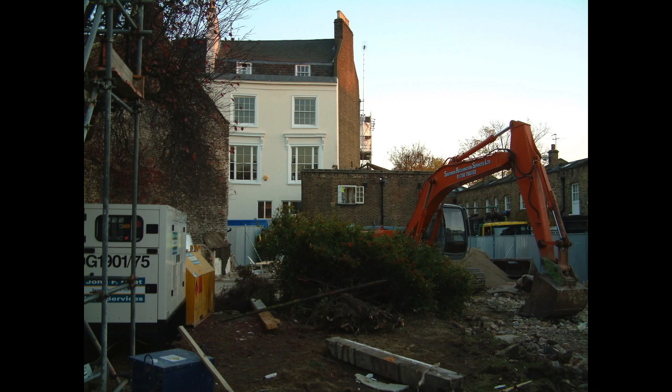The house looks like so, and I shan't talk in great detail about it. But to realise it, to create it, one day we arrived, having got our planning permissions and so on, with a digger on site and started bashing things around, digging holes. We created this great subterranean undercroft in order to insert the swimming pool, which is part of the brief, which is actually what I'll mainly talk about. And what I enjoy here is this kind of temporary steel strutting, which forces the earth apart, ready to have this concrete insert, if you like, going in to form the swimming pool. So big holes, as you can see, and then the swimming pool itself.

This is underground, and you can see that these great beams straddle the width, almost taking the place of those steel props that you saw earlier, forcing the earth apart. And having forced the earth apart, we've managed to create the opportunity for daylight to come into the space and play down across the beams, to play across the pool and produce this extraordinary ladder-like reflection. So it produces this very austere space.

But I think what I found here was the interest in the beauty of the raw material, that often it's used and regarded as a sort of cheap and nasty material, damp car parks full of stalactites. But actually, concrete, if used right, is actually very expensive to do, and it has a material quality, I think, which sets it apart from many others.

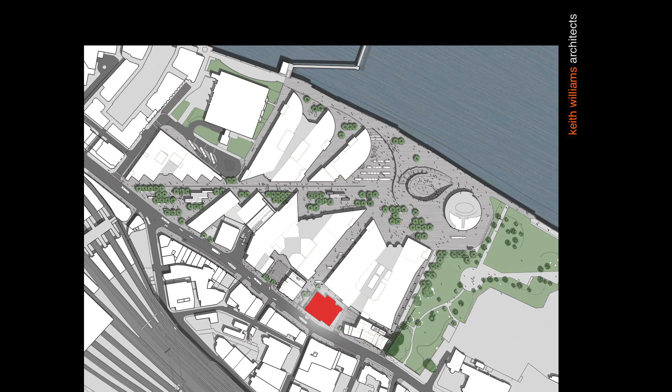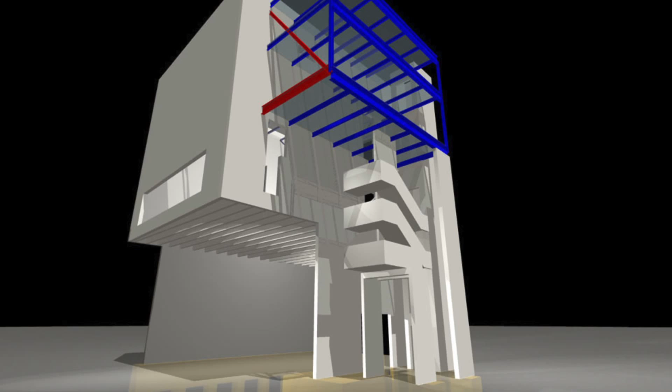At about the same time we were working on the Unicorn Theatre in Southwark, which looks like so. And what I wanted to try and achieve was a series of huge cantilevers over the foyer to dematerialize, I think, the corners of the building. So this is Arup's structural model, the grey being concrete and the blue and the red being pieces of steel clipped and bolted onto the concrete.

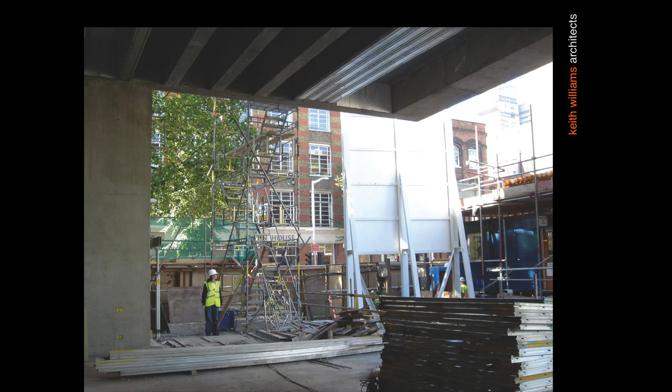You can see there's this enormous cantilever, and the cantilever actually supports the main theatre, which is in the sky, 7 meters above the pavement. And then the cascade of the staircase, which is part of the procession from the street to the seat. So during construction, you can see this huge cantilever, again with trabeated beams manifesting itself.

Concrete is incredibly heavy. It weighs about 2.4 tons per cubic meter, which is quite a lot. So that staircase will weigh a number of tons. And I think what I enjoyed with this project in particular was the perversity of making something very heavy appear to be very light. Concrete allows you to do that, allows you to play games with it.

And also I talked a little while back of the sort of richness, the luxury of the concrete. And here I think it sitting alongside pre-patinated copper and black American walnut, it sits very comfortably with these sort of slightly luxurious materials.

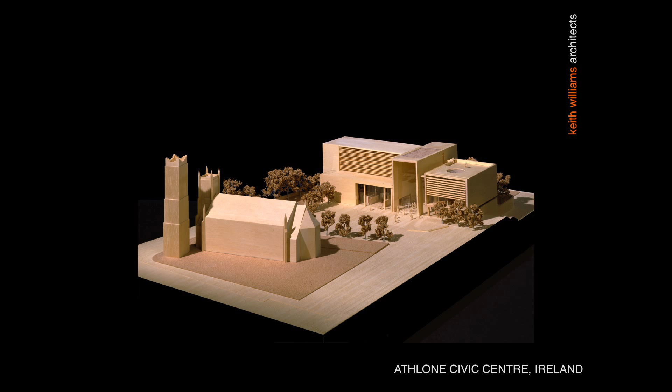In 2001, going back a while now, we won the competition to design the new civic centre in Athlone, which is in the middle of Ireland, on this former brownfield site with a church immediately opposite. Here the study model of the civic centre, which is the debating chamber, the secretariat, and the library.

We decided very early in the piece to make a largely concrete building for sustainability reasons and also for architectural reasons, which I'll come to.

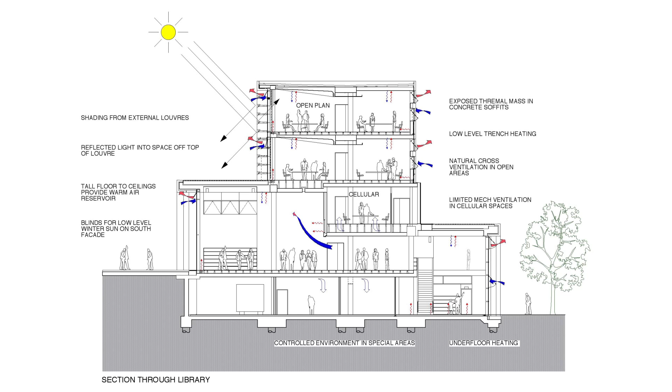This diagram, I think, is important, in particular on the left-hand side. You see the sense of brise soleil excluding the solar gain, that is the south-facing facade. And in order to prevent the building heating up in the first place, using the great volumes of the entrance hall to exhaust warm air should it come to pass that the building begins to heat.

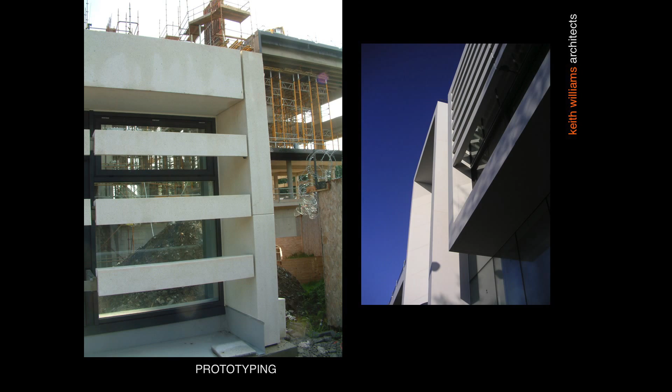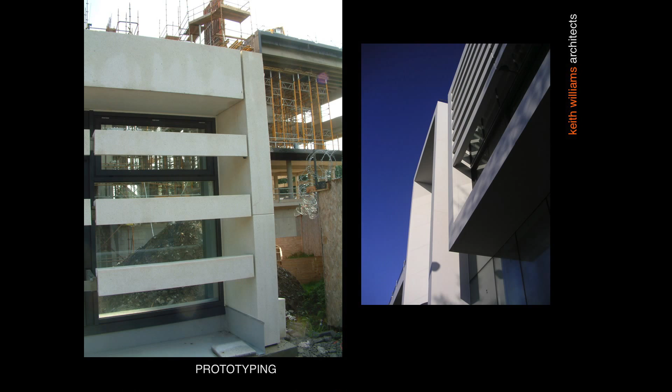Having studied that in many different options, we then created on-site a prototype of the brise soleil in concrete. It's actually, I suppose we call it cast stone because it's coloured, it's through-coloured, it has a particular aggregate colour, has a particular series of fines, that's the granular material around the aggregate, and that's cast integrally with the structural beefy stuff that does the work. That can be in many, many different colours according to aggregate and fines. Here we've chosen something almost like crushed dolomite, which gives that sort of white, pale colour.

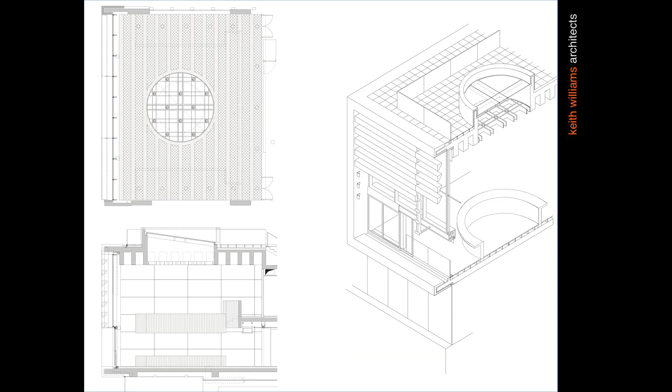And on the right, once the prototype was agreed and formed, the great precision that you see in those blades, those concretes, each one of which will weigh several hundred kilograms, which are bracketed off the glazing from the exterior. So here the detailed drawing, here the detailed shot showing how precisely the arrises can be made. And I should say these are all made in a factory, therefore there's a great deal of control over the moulds and over the fabrication and honing and polishing techniques.

And then internally, that shot you've just seen is the exterior of the space we're now looking at, which is the debating chamber, which again has this heavy in-situ trabeated roof with the oculus, the round roof light above the debating chamber where the councillors sit. And then you can just see these tiny shafts of sunlight which seep between the brise soleil, which shows that it does its job.

Above, the surfaces are clad in precast concrete on the roof terrace. So here we're looking at the exterior of the building, which is completely clad in precast stone, which is actually sourced from works in Dublin, so 80 miles away or thereabouts.

The importance of the architecture treatment and the surface materials is really that this is an important, fairly evidently important public building. All of the important public buildings in this town are actually made of stone. Not white stone, not pale stone.

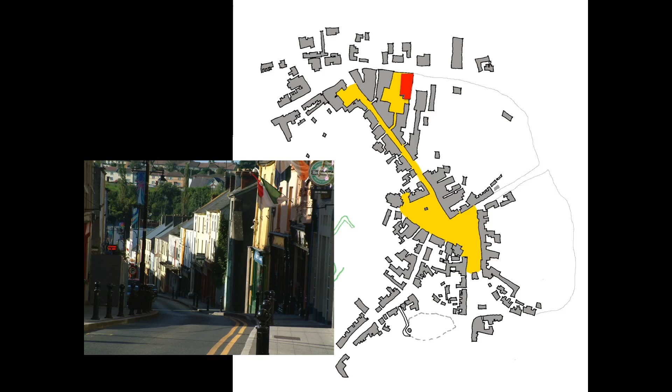So in this hill town, with its traditional winding main street, we created this library and county offices, built in a similar panel system of cast stone to Athlone that we've just been looking at. Here a smaller building, and the masses are grouped in a very powerful way to express the use. The top part is the county offices, and the bottom part is the library.

I think one of the things we enjoyed, having learnt a lot about the precision of this material, which is precast and comes in sort of 7 or 8 metre lengths, or less, is that you can do a whole storey or a double height space in one go, and you can create very precise junctions.

So if you look at the cantilever, it sits very directly upon the parapet of the panels below. There's no overlapping of form, which would be the more obvious and traditional way of detailing this. And also you can detail it so you have no apparent coping.

There's no metal copings or flashings. It's all dealt with totally in material, which allows you to produce these exceptionally sharp and clean lines. The Athlone bench creeps forward again into the second project.

And here the dynamic of the new building as it protrudes from the kind of light industrial buildings that surround it. Internally, the 7-metre high space is capped with this trabeated roof, which is punched through in enormous bays to bring light into the depth of the library.

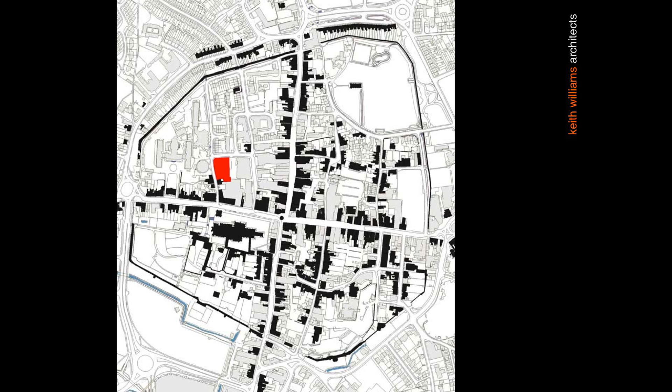The cathedral is just in the southwest quadrant near West Street, and we're in the northwest quadrant on the site marked red. I should say the listed buildings on this diagram are all marked in black. You can see the listed buildings start to run out in this quadrant because there was some substantial replanning during the 1960s and 70s, which tore down all that nasty Victorian stuff like a grammar school and a wool depot, and replaced them with a car park.

The one thing they did do, which was quite good, was to put in this interesting circular library, which is quite a distinctive building in Chichester's sort of balance of buildings.

So we won the RIBA competition to do two things: to build a new museum, but also to build a housing scheme and to try and complete an urban block which would occupy the whole of that car park site. It's surrounded by, or at least has many adjacent, quite delicate tissue of Georgian buildings.

These cottages are Georgian. But beneath the car park, at the end nearest to this viewpoint - in this bit of the car park where there aren't actually any cars, just markings - sits the extant remains of the Roman city's baths. They date from the Flavian period, which is the 1st century AD.

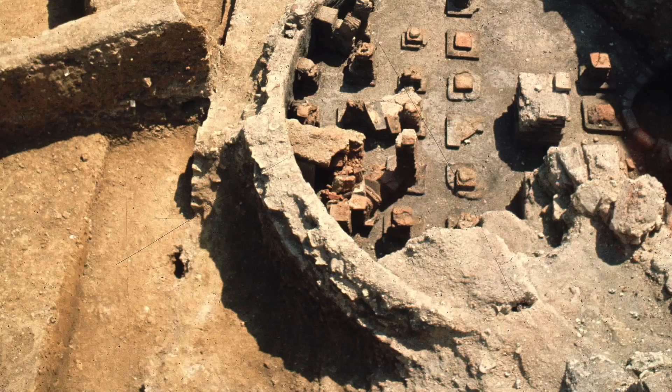So what we're looking at here is the hypocaust, about 1.5 meters below the present-day pavement at street level. And we're looking at what is certainly an apse, could have been actually a dome - there appears to be insufficient evidence to determine that. But I understand also that there are elements of Roman concrete in amongst the masonry.

So maybe we've come from Roman Rome to Roman Britain, and they brought some of their concrete with them.

To give you an idea of dimension, that semicircle is about 8 or 9 meters in diameter, so it's quite a substantial thing.

Our task, as will be evident from looking at the slides, was to rediscover that archaeology. It had been surveyed in the 1970s, covered over by backfill and car parking material, and kept encased until a future opportunity for redevelopment came along. The city determined this was such a valuable asset that it should be part of the museum, which tended to suggest that the museum would go over it.

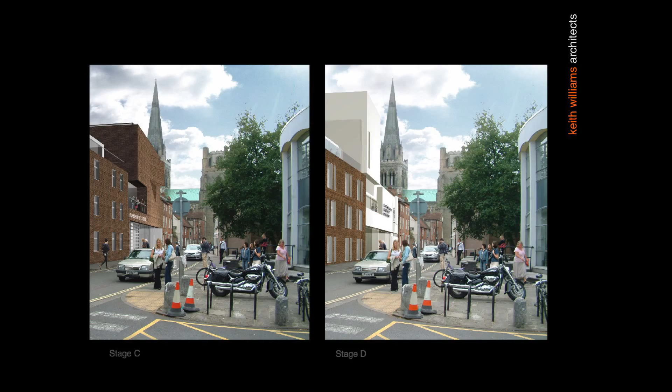We spent a long time thinking about what kind of material this museum should be. As I say, the museum is part of the site and housing would occupy the rest. Our early studies suggested brick because there's a lot of brick in Chichester, and many of the background buildings are brick. But we thought long and hard about this, and actually, even the library, the circular 1960s library, has a different materiality.

It has a kind of whiteness, a paleness to it. The cathedral, which is made in Caen stone, has a sort of yellowy whiteness when it's cleaned. So we began to think that whilst the cathedral is the biggest gig in town and will remain so, the material we chose ought to have a coloration closer to that than the brick surrounding buildings, some of which are primarily background buildings. So we decided to say, hey, we are a public building, and that gave us the opportunity to colour the building and choose a material which is a cast stone, which had something to do with that idea.

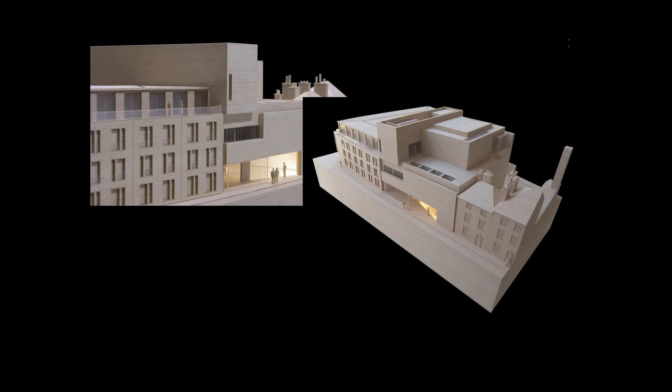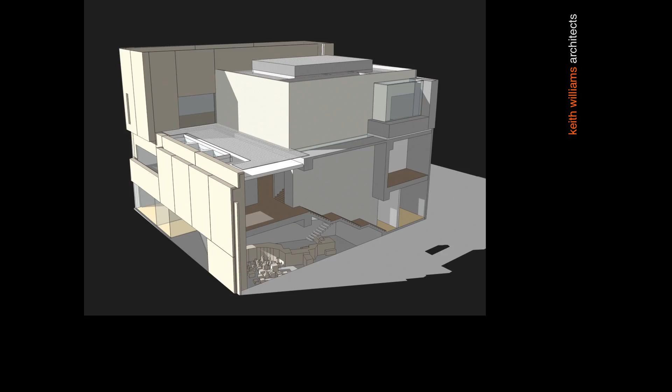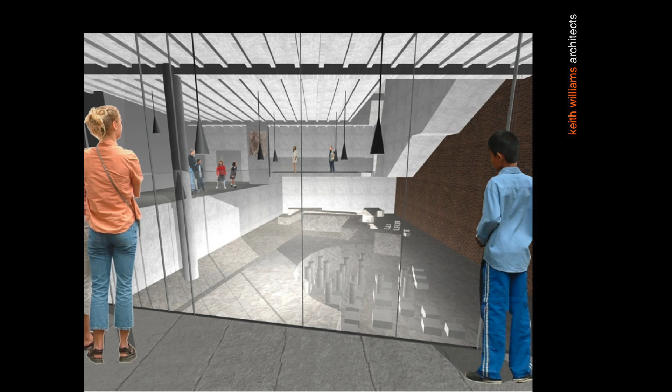So then we began to develop the form of the building in relation to the housing. We began to explore the sections, and here you can see the section through the Roman remains, some metre or metre and a half below street level, with the Roman entrance gallery and two further galleries above. So here the cutaway drawing, and early images showing the view from the street through a shop window, a vitrine if you like, which would reveal the remains to the passing public.

As it turned out, when the exhibitions were developed, there was a particular requirement to introduce projection, which meant we had to reduce the level of daylight in the public hall. So actually, in the end, part of that became screened by a film artwork, an applied film artwork. Nevertheless, the idea still works because you can still see into it.

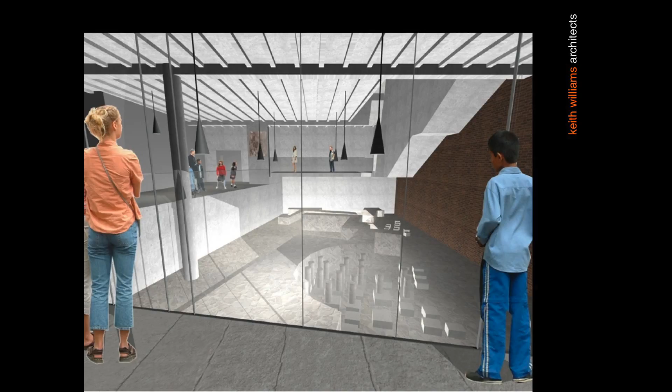Here in this early study, there's a lot of concrete, as you can see in the grey, but intriguingly, that right-hand wall, as we look at the screen, was done - we were proposing brickwork at that time. It was only later that I decided we should have a total approach to concrete, so as to make a distinction between Roman archaeology, which is primarily masonry, and our new 21st century stuff.

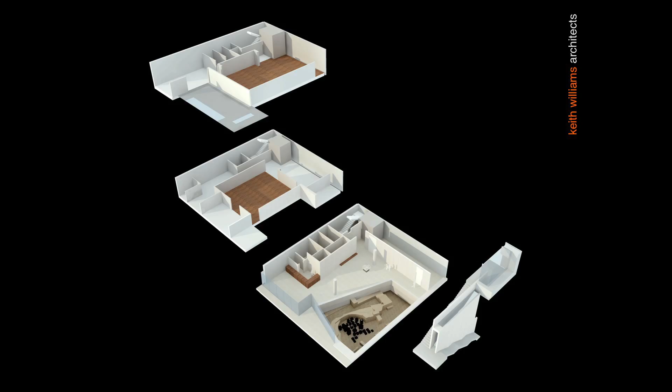So here the cutaway of the various galleries with their wooden floors, and the archaeology all linked together by this staircase in the exploded drawing, which takes you wandering up through the building of this long processional stair to the cathedral window at the top, of which more later.

We came under - I can't tell you how difficult it can be to build contemporary buildings in historic cities - there is this key date, which some say is 1820 and some say is 1830, which is the end of the Georgian period. And if you propose buildings that look like they were designed after one of those two dates, then at least a section of the community will look at you with deep suspicion, as though you're committing some appalling kind of sin by introducing contemporary thinking and contemporary design into a historic city.

But I think our clients here at Chichester, and also in Canterbury for the Marlowe Theatre, recognised very clearly that whilst these cities have an incredibly important past, fantastic historic buildings which are their main draw, they must have a future. And I think our buildings in both cases try to celebrate and embrace that idea of a continuum, introducing important new buildings into the historic cityscape.

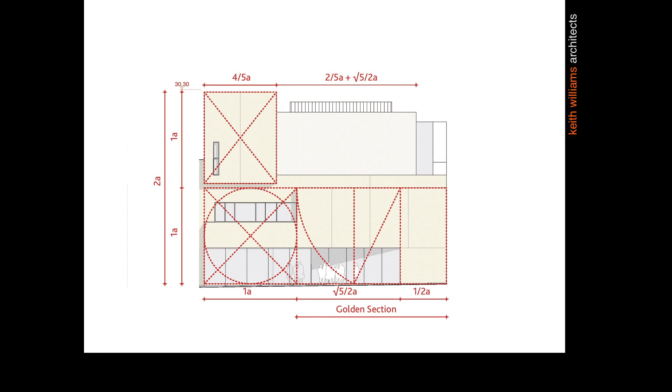In order to actually get that to work, all I had to do was tweak the height of the turret by about 100 millimetres down, and everything else just dropped into place. Which sort of told me that after you've been doing this a few years, when something looks about right, it probably is about right. This is a way of testing it, which seemed to work quite neatly and nicely.

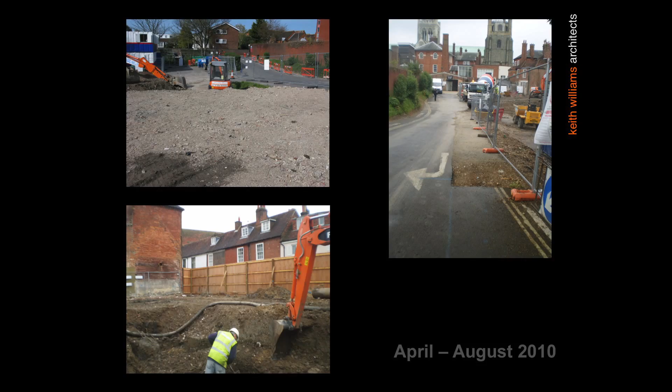Which then produced the final elevations, the final form. So we began to build the ordinary aspects of the project: the retaining walls, the lift shafts, the piling. We did a lot of work on the coloration of the concrete and its finish, which I'll come to, and we also did a lot of work with the engineers on that and on the piling.

The engineers, Techniker with Matthew Wells and his team, helped us find a way of sitting the building very lightly on its site. We needed to be very careful about the archaeology and find ways to impact it the least. The piling system that eventually came through only sits on 6% of the footprint of the site, so it has a very light touch and leaves the archaeology intact. Our building bridges over the archaeology, over the Roman baths in that sense. The piling is limited primarily, although not exclusively, to the edges of the site, but it always dances around the archaeology itself.

So in goes the piling, the secant walls, and so on. My end vision was to create a sort of lustrous concrete of an even higher order than the in-situ concrete we'd worked with previously. We had many samples created.

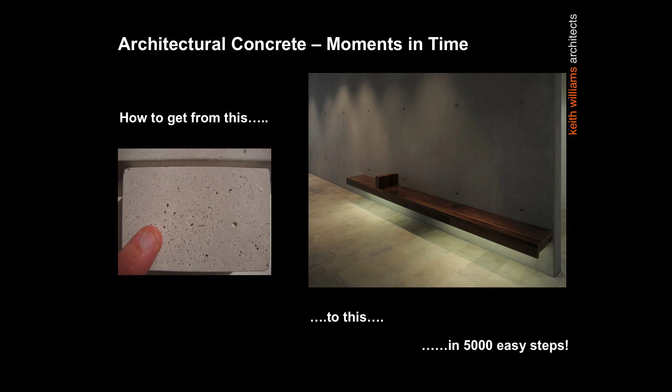What you see here is our sample in the office, which was put together in a laboratory by a concrete supplier, and actually the finished thing. I'm going to share with you the warts-and-all process of getting from something knocked up in a lab by scientists in white coats to the reality of a building site. There are few seamless routes between one and the other.

The first part was really about the performance specification, and again Techniker and Matthew Wells' team helped us draw up the specification. I wanted to move from standard grey cast concrete into something which had a surface texture, and also had a sort of lustre, some sparkly bits in it, because I wanted to see if we could make a kind of lustrous concrete that added a subtle sheen and dimension to this, to me, wonderful material.

And this is not easy. We're dealing with very heavy materials that get put together on site in often pretty awful conditions. Somehow it always seems to be that they're pouring concrete in January and it rains and it's awful and so on. So it's very difficult.

We introduced a series of silver granite aggregate elements and fines into the concrete, and then surface brushed it to achieve the finish where, on the right hand side, the finger is pointing - not my finger, I should say, my project architect's.

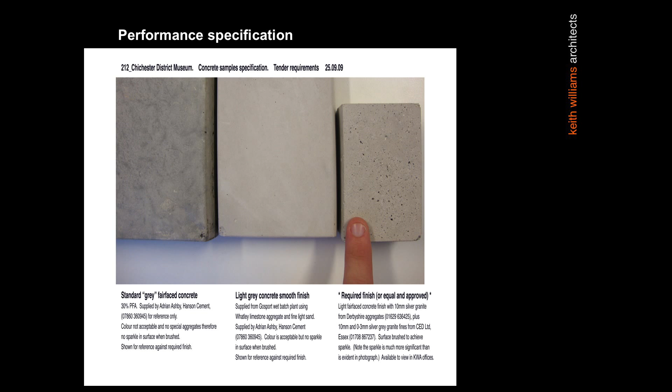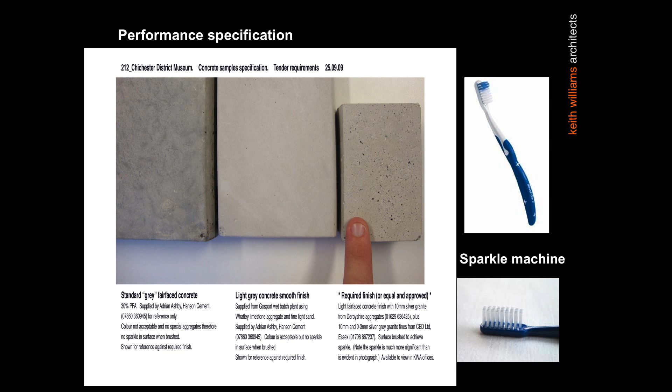There was some concern about how we might actually achieve this finish on site, this brushed finish, and the concrete firm's rep said, well, I used a toothbrush. So we did think actually issuing toothbrushes to our contractors as a magic sparkle machine was probably not going to go down well. So we decided to wing it and work it out when we got on site.

There's a great difficulty in a small building in preserving batches of concrete, because you can't pour it all at once. You can set aside aggregates and fines, but you can't 100% guarantee what's going to come back to you on site. One pour might happen in October, another might not happen until mid-November, so the opportunity for variance is quite significant.

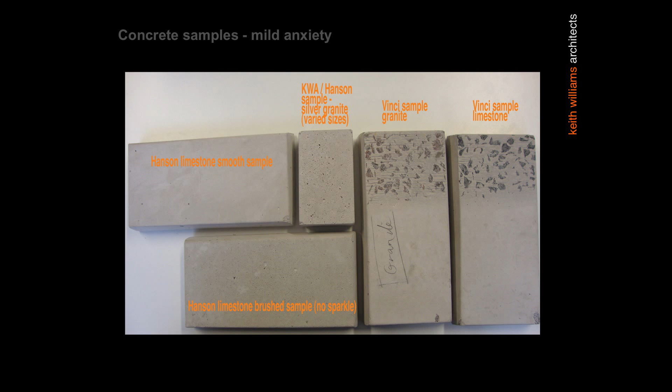So that was a great concern, quality control at the batching plant. And the early samples that came through were completely unpromising and nowhere near what we had in mind. As you can see from the samples, the small one, mid-top, was actually what we wanted, but these various other samples have very little relationship to that.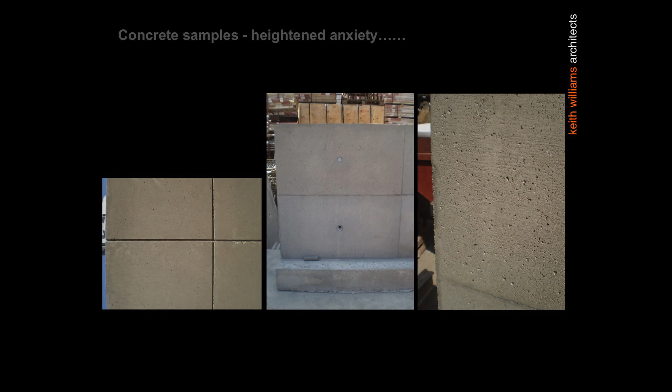Duffy, who were the concrete subcontractors of Vinci, the main contractor, worked with us at Technica to try and get there. Various panels began to appear and we critiqued them, talking about arrises and jointing, how the spacer bar holes—a necessary part of forming these concrete panels—would be treated, how we'd deal with surfaces, and light fittings, all of which had to be cast into the flank walls.

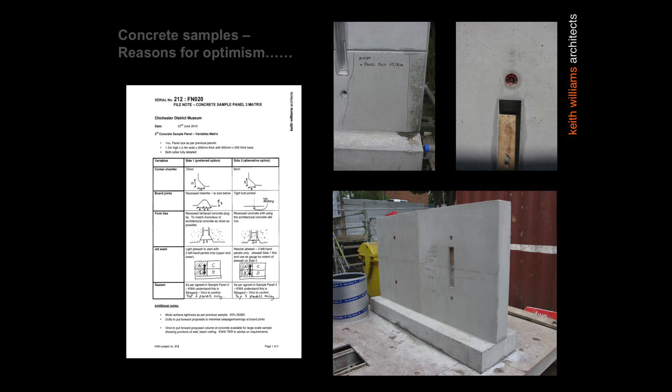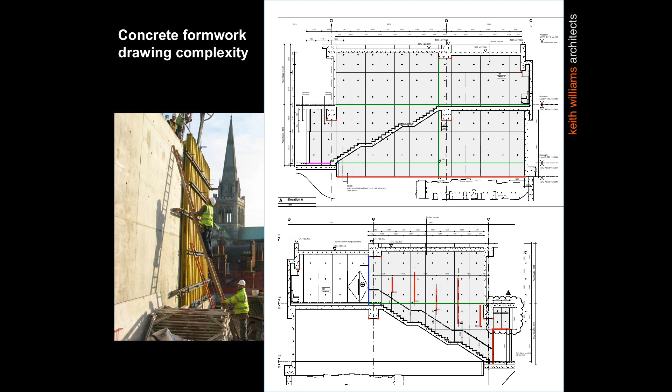We drew it endlessly. Each panel is 2.4 by 1.2, a piece of plywood, 250 mil thick, so I think it weighs about two-thirds of a ton each. That's a huge lateral force pushing out on the formwork, so it has to be bolted through to stop it bursting.

A great deal of effort went into the quality of the shuttering ply and the slip membrane, to ensure the concrete and the form debond comfortably, and so on.

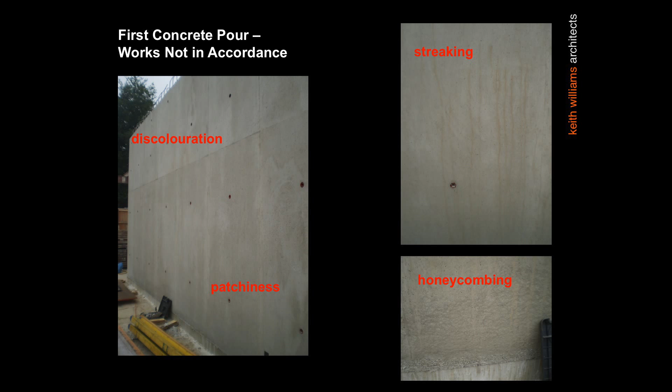As the walls began to go up, in the first concrete pour we got discoloration, patchiness, streaking, and honeycombing—all the things you don't want. So various techniques were applied: no toothbrushes, but bag washing, Arbablast, light sanding, and sealing. In truth I don't actually know what they did on each panel, but a combination of one or more of those techniques was used to produce the final treatment.

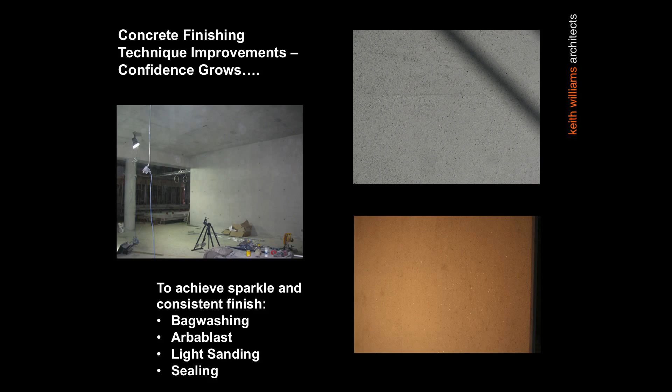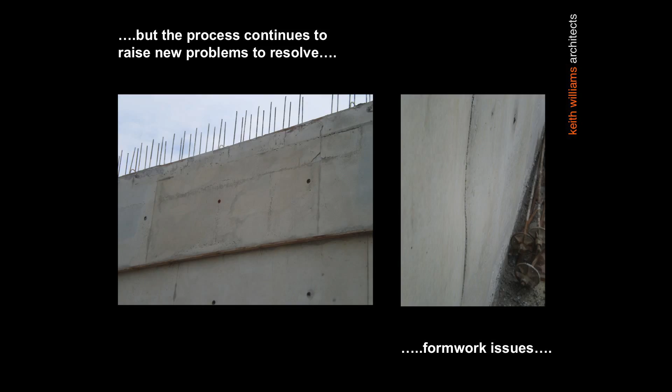Once we had those, we established from our sample panels and the first pour a set of quality control benchmarks, then referenced everything back to that as the project progressed. But again you get formwork issues, patching, surfaces bursting where they hadn't been cast in properly, or bursting through when the formwork struck, and streaking in the finishes.

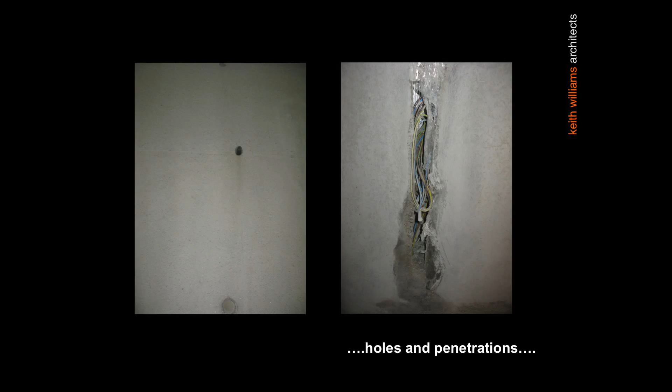My project architect called this 'finishing fear'—lots of anxiety through this whole process. Because I'd said to the client, when they said they didn't really want concrete, wouldn't it be a bit like a car park? I said, don't worry, I'm going to do a special finish, it'll be fine.

What sort of special finish will you have? They cry, and I say, well, I'm not sure yet, but it will be special, don't worry. And when I relay this to the office, they all put their heads in their hands and say, how are we supposed to do this? I said, well, I don't know, but I think a sparkle, and you'll find a way of sorting it out.

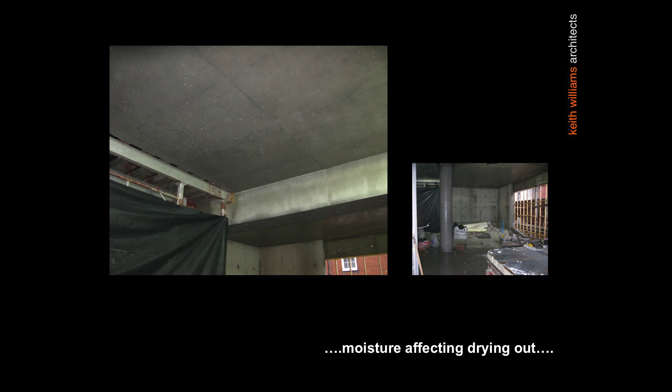So anyway, they did—it wasn't easy, I have to say. You get effects from moisture drying out, because a huge amount of water goes into a concrete pour, and that has to find its way out somewhere. A lot gets absorbed in the hydration process of the concrete forming, but not all of it. In the end, though, we created a lustrous material—it does sparkle, and it has produced an extraordinary kind of effect.

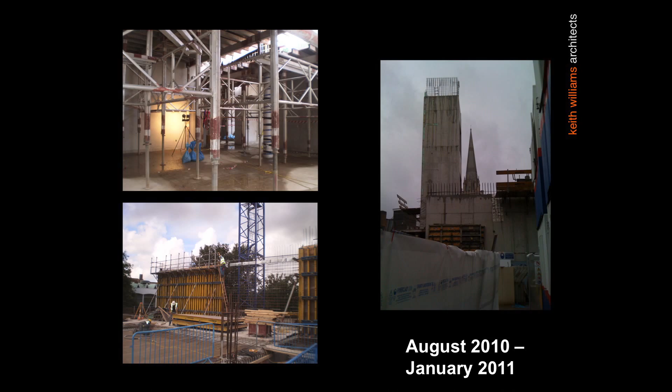As the process wound on, the formwork continued, and the building's in-situ components began to take shape.

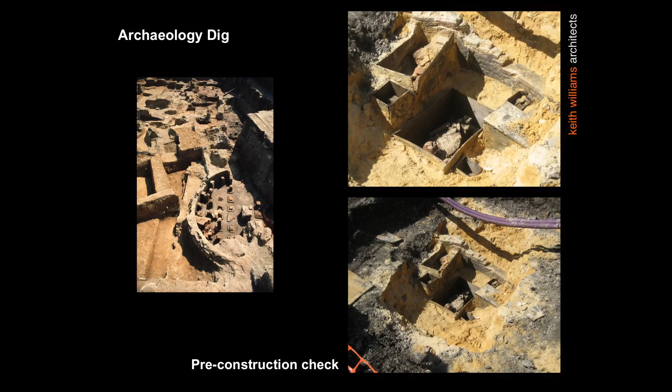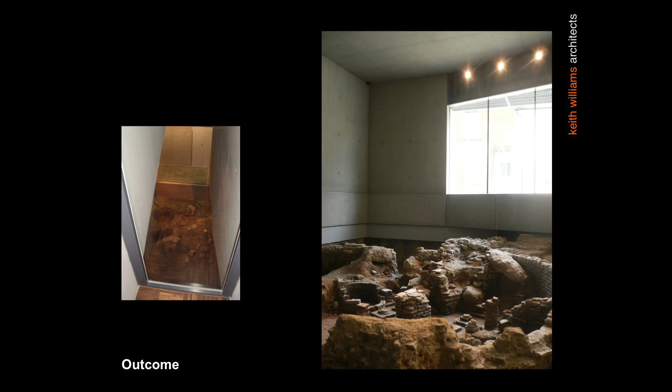The archaeologists were working on the dig, because we had to leave the archaeology covered up while the main construction was going on, so no damage was done. The archaeologists worked away, labelling and carefully excavating with brush—toothbrush, I guess not—to expose the remains.

Meantime we were working on the exterior, the cast stone, again with Techcrete, the manufacturers who did Athlone and who did Clones Library with us. We looked at many different finishes—we could have had pinks, browns and greens, but we didn't think that had much to do with Chichester.

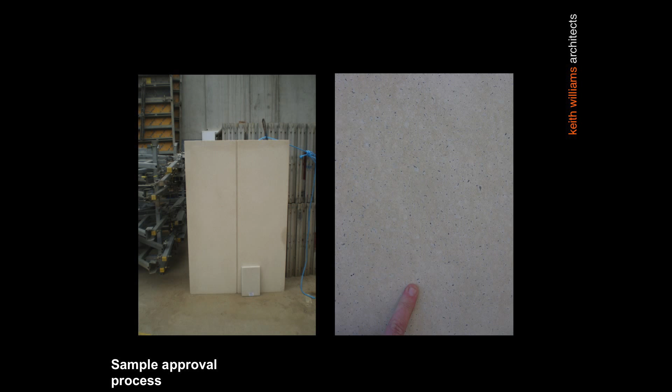So we went for a slightly honey-coloured, honed finish, which has a colour affinity to the cathedral stone—not exactly the same, actually slightly creamier in reality than it appears in these photographs. It has a granular quality which gives it the sense of being stone, although one is working with much larger panels, so it's clearly not ashlar or conventional stone in the sense one would know.

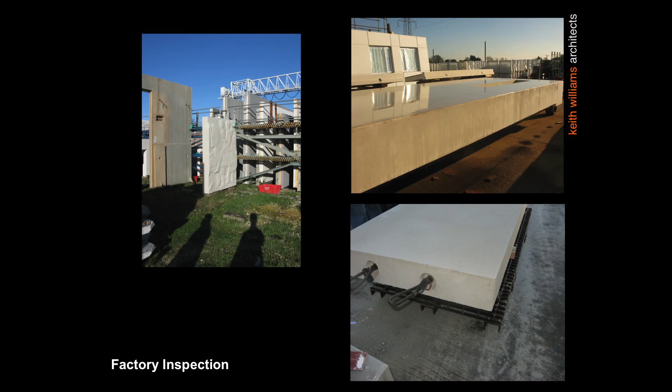So it's a flatbed process, and here we can see some of our panels popped from their moulds, turned over, polished and honed, ready for final finishing. In the factory you have a great degree of control, a great degree of technical authority over the final finish.

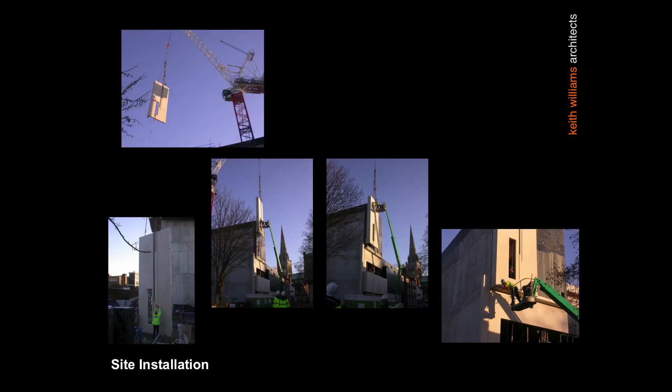And then the magical thing is that one day all the stuff turns up on a flat loader and gets craned into position, and it all seems to go up in an afternoon. Then we're cutting to the building as it's being finished, and you're beginning to see the concrete emerging and being viewed over the remains.